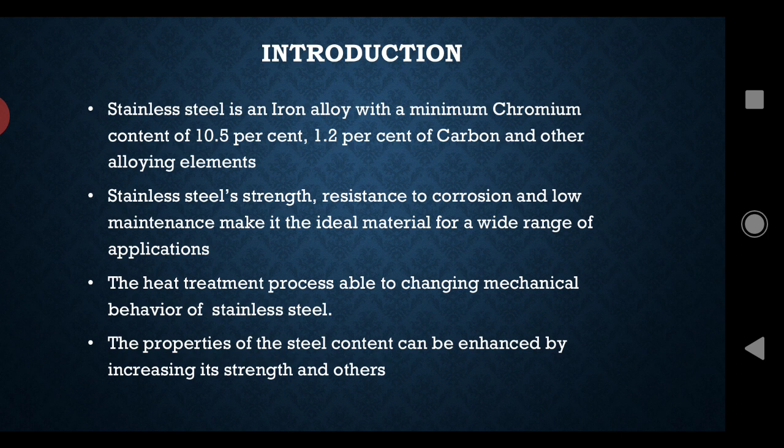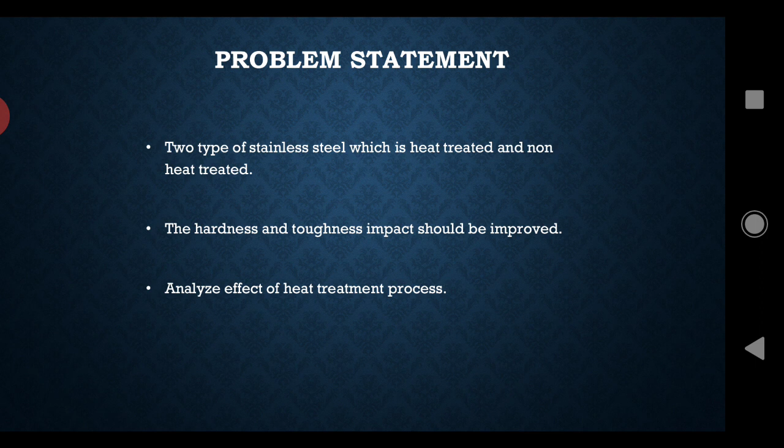For the problem statement, as we know, stainless steel has two types, which are heat treated and non-heat treated. So we must know which one is heat treated and non-heat treated stainless steel, because non-heat treated stainless steel cannot be heat treated, it is not suitable. And then why we need to improve the hardness and the impact toughness, and then how we analyze the effect of the heat treatment process.

Okay, this is my research objective: to study the difference of the mechanical properties of stainless steel before and after heat treatment. We study the difference before and after, what is able to change the microstructure during the heat treatment process, and then to conduct and analyze the hardness test of the stainless steel in order to study the mechanical properties of the material.

We handle the machine, we run the machine, and analyze the hardness by interpreting the data from the result. Same goes for the third research objective, which is to conduct and analyze the impact test for the stainless steel in order to study the mechanical properties of the material.

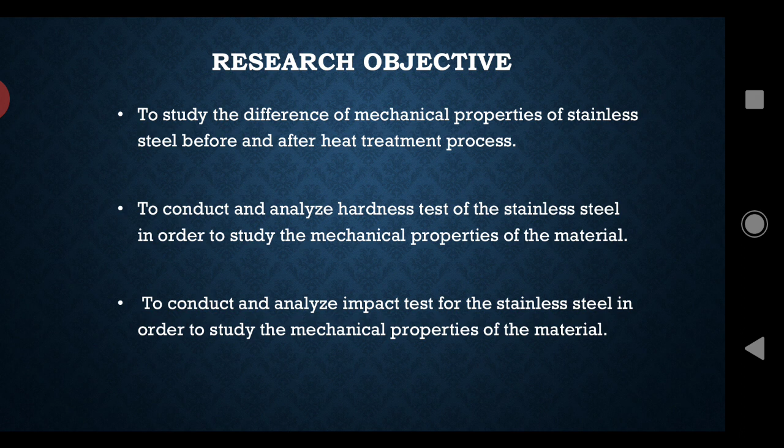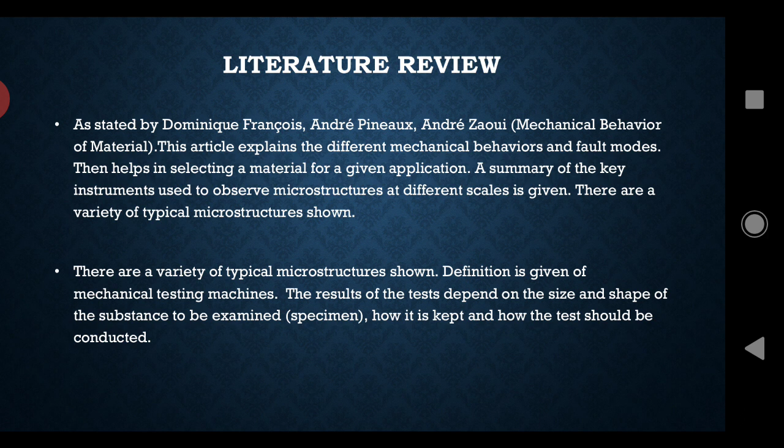Literature review. Stated by Dominique François, André Pineaux and André Zaoui in the article Mechanical Behavior of Materials, it shows the different mechanical behavior and failure modes. This is a good literature review among many journals and papers that I have researched. We can observe from the research article the microstructure at different scales, and many types of microstructure after the testing process. Such as this one, the result of the test depends on the size and shape of the specimen, how it's kept, and how it should be conducted.

Okay, next to review the key point of this article by the Kinnek Knowledge Team. He said that stainless steel is perfectly suitable for a wide range of environments, unlike other popular materials such as wood, plastic, and various metal alloys. Stainless steel is more costly than regular steel grades, but it has better rust tolerance.

Based on the module by W.M. Garrison Jr. in the Encyclopedia of Materials Science and Technology 2001, there are three types of martensitic: the first is strengthened by iron carbide precipitation at low temperature, the second is strengthened by copper or intermetallic on tempering, and the third is a combination of alloy carbide precipitation and intermetallic, a combination of the two components.

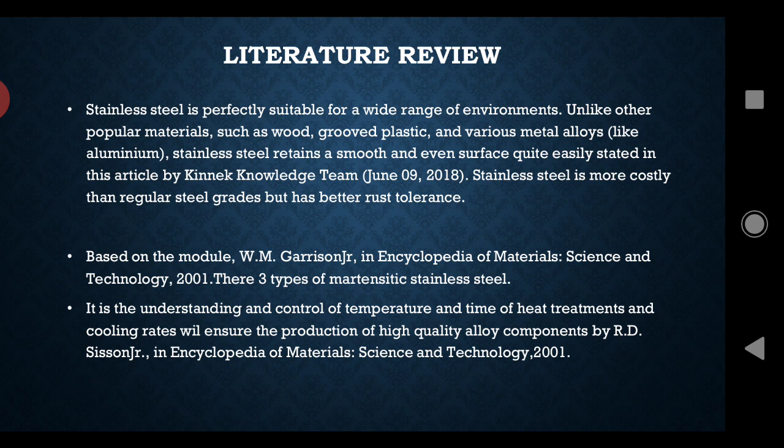And the understanding from the article by Sisson Jr. in the Encyclopedia of Materials Science and Technology 2001 is that we need to understand and control the temperature, time, and cooling rate for good production of high quality alloy components. We need to know the parameters to achieve a high quality alloy component.

Okay, methodology. Before we start testing, we need to know the type of material, the specific material, and we need to prepare the machine. The stainless steel raw material will be machined in the FTK laboratory at Makmal Pemesinan 1 referring to the required dimensions of ASTM A370-19e1. So we need to know the size and shape of the actual specimen before we start the testing.

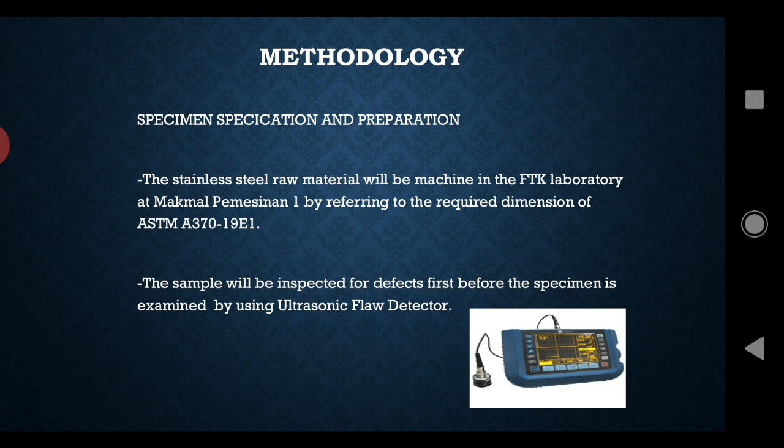And then for stainless steel, we need to inspect for defects before we start the testing by using an ultrasonic flaw detector. Okay, heat treatment.

Okay, heat treatment has three steps. We need to know the three steps before starting the testing. Okay, the material specimen: for the stainless steel we have chosen martensitic stainless steel because it can be heat treated. So we need to choose the better stainless steel for this testing. Okay, for the heating, prepare the specimen for the first step of the heat treatment, which is the heating process. The specimens are heated to a specific temperature and it will change the material structure.

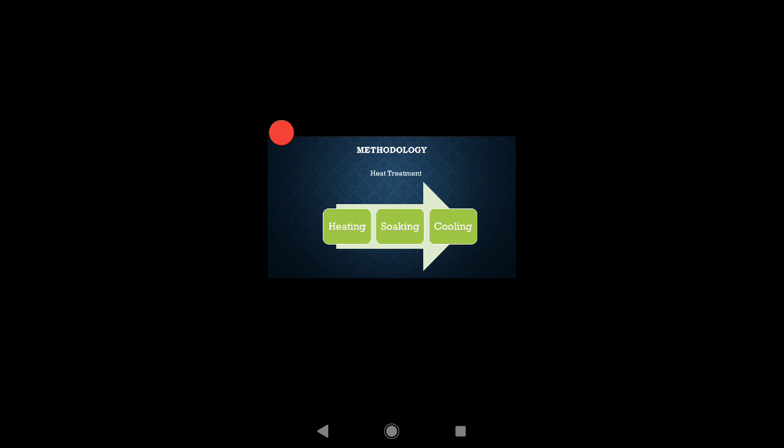Secondly is soaking. After the stainless steel part has been heated to the desired temperature, the time of soaking depends on the mass of the specimen. The more mass the specimen has, the longer it must be soaked. After the soaking process, the third one is the cooling process, and the structure of the stainless steel may change composition or not change, or it can be back to normal form.

Okay, during this process we will use three types of quenching medium, which are oil, water and natural air. They will show different results by using different media, and then different microstructures.

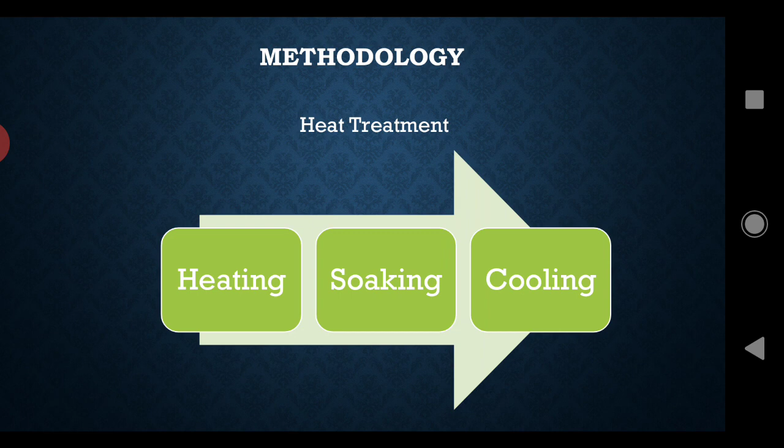Methodology. Okay, for the hardness test, the procedure follows the Rockwell hardness test. As we know, stainless steel is a very hard material, so we use the diamond pyramid indenter for this Rockwell test, and a load ranging from 10 to 150 kilogram force is applied to this material. And this hardness will be read on the C scale because it's suitable for hard steel like stainless steel.

And before testing, we need to know the type of material, the test location, which location we need to do the hardness test, and the specimen thickness and the scale limitation.

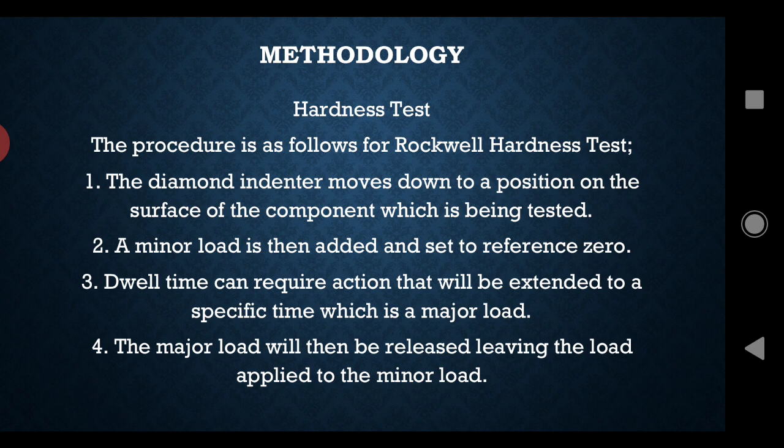And we need to know how to run the machine: switch on the computer, switch on the machine, and ensure the hammer is not rigid and does not move. Zero the energy, start the test. And then don't forget to record the reading of the impact for the data analysis. Stop the impact testing machine after completion.

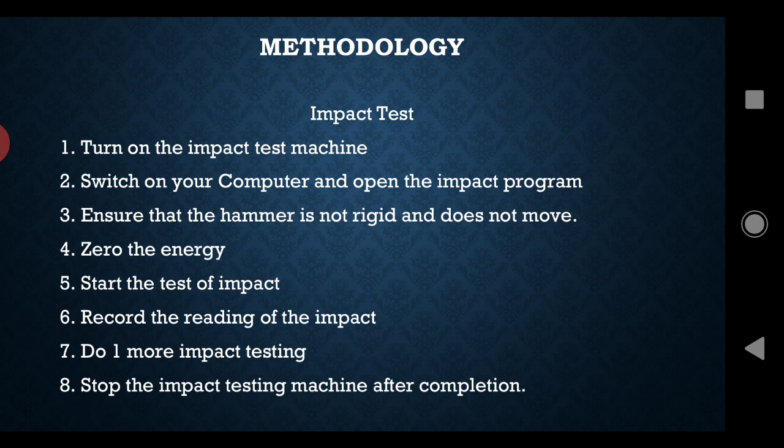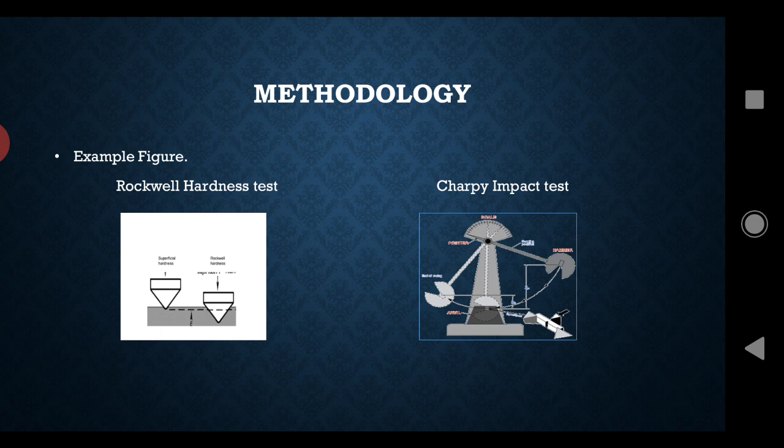This one is an example figure of a Rockwell hardness test, where we use the C scale limitation, and we use the Charpy impact test. Okay, for the result, we don't have a preliminary result because we cannot use the FTK laboratory because of the pandemic.

So based on the reference articles, Heat Treat Quenching, Akron Steel Treating, and IQ Technologies, martensitic stainless steel is very suitable for this experiment because it is hardenable by heat treatment, and the alloy composition and the high cooling rate of quenching enable the formation of martensite, and untempered martensite is low in toughness and therefore brittle.

So the quenched part is usually very brittle, and it is reheated to a temperature below the critical temperature to temper the part, soaked for a period of time. Generally, the higher the temperature, the lower the hardness, but the higher the ductility and impact resistance. Hardness and strength, ductility and impact resistance are balanced by the heat treaters.

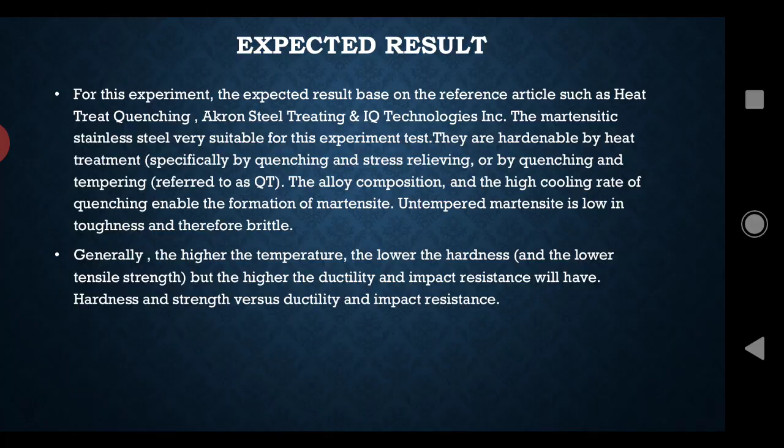For the conclusion, the mechanical behavior of the stainless steel will change more after the heat treatment process: the microstructure, the composition, the physical, and mostly the mechanical behavior. The characteristics of stainless steel need to be studied before starting the heat treatment process, and we can conduct and analyze the data from both tests, impact and hardness, during the research. So martensitic stainless steel is suitable for this experiment because it can be heat treated.

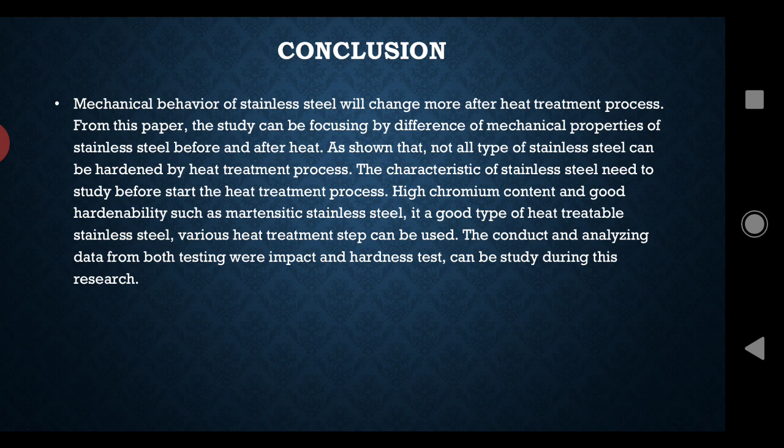Okay, this one is our Gantt chart. From week 1 until week 3, we just do the selection, briefing, and explanation for this project, and discuss the problem statement. From week 4 to week 7, drafting, literature review, and writing the chapter. Submission of the chapter in week 8, research and methodology writing of chapter in week 9 and week 10, writing the preliminary result,

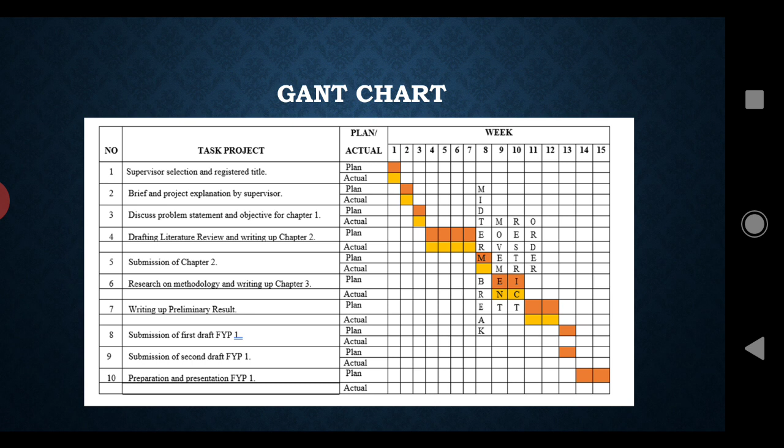but we just do the expected result. Submission of FYP1, second draft in week 12 and week 13, and then lastly preparation and presentation for FYP in week 14 and 15. Okay, that's all.